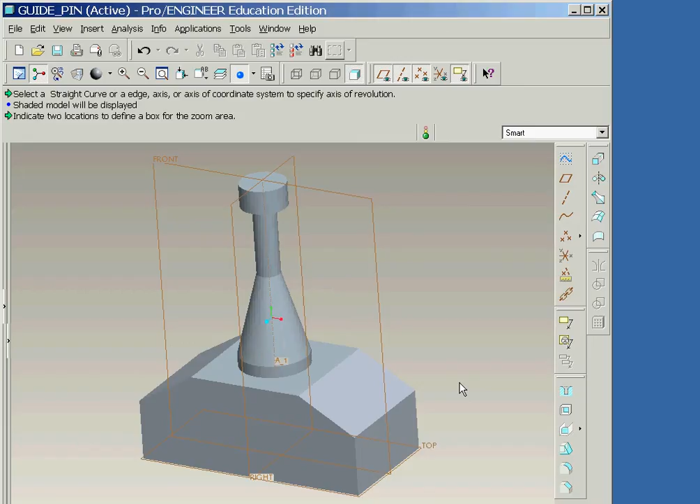In this session, we'll construct our new part's base feature and then examine how a revolved feature can be created. We will start a new part using the default template this time and naming the part Guide Pin.

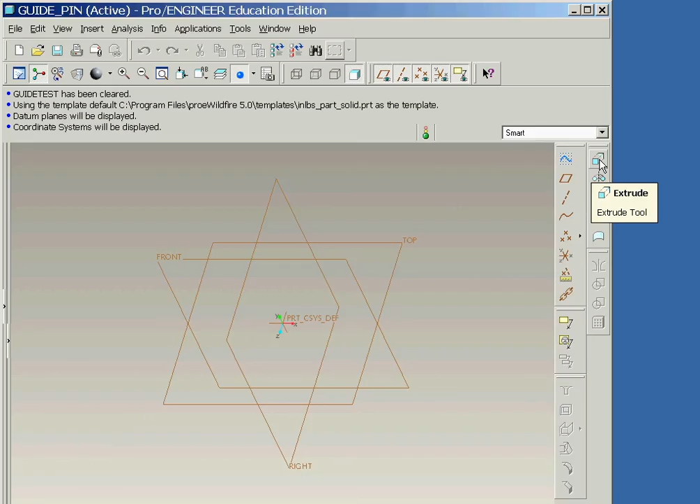We will be sketching a profile of our base feature on the front datum plane and then extruding it on both sides, so we'll start by selecting the Extrude tool icon. And then click on Placement and Define. We will now click on the front datum plane in order to select it as our sketching plane.

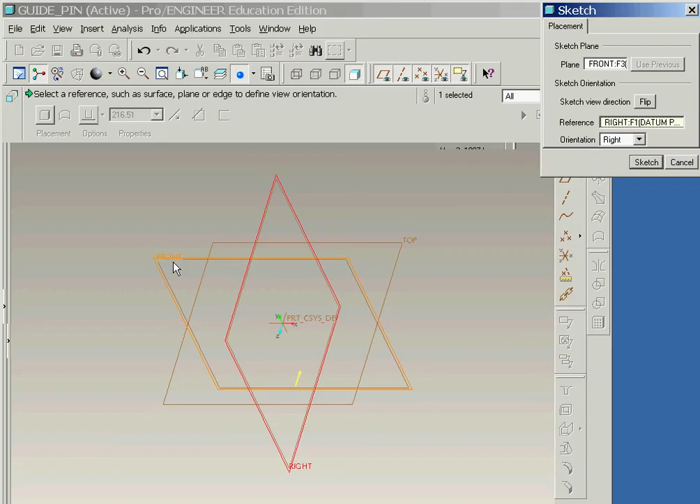Notice that the right datum plane has automatically been selected as the reference plane. Since this is what we want, we'll now click the middle mouse button. As you can see, the dashed lines indicate that the top and right datum planes have automatically been selected as the sketching references.

Before we start to sketch our profile, we'll turn off the display of the datum planes and the coordinate system. We'll next click the right mouse button and then select the line icon. We'll now draw the profile by using a series of left button clicks, followed by double-clicking the middle mouse button to stop the process of drawing lines and entering select mode.

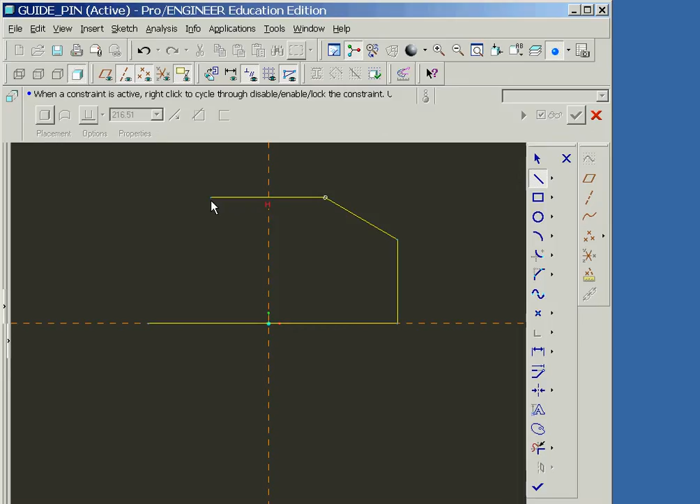Next, we'll click and drag the dimensions of the profile in order to clean up the sketch. We will now click on 3 of the dimensions and change their status to be Strong Dimensions by clicking the right mouse button and selecting the Strong option.

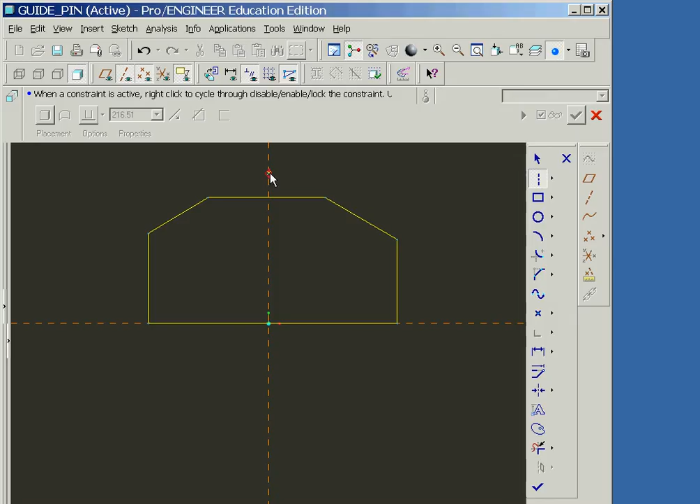Next, we'll add a center line to our sketch. And then we'll use the Sketcher Constraint icon in order to impose symmetry in our sketch. We will do this by first selecting the center line and then the 2 endpoints that should be symmetric about the center line.

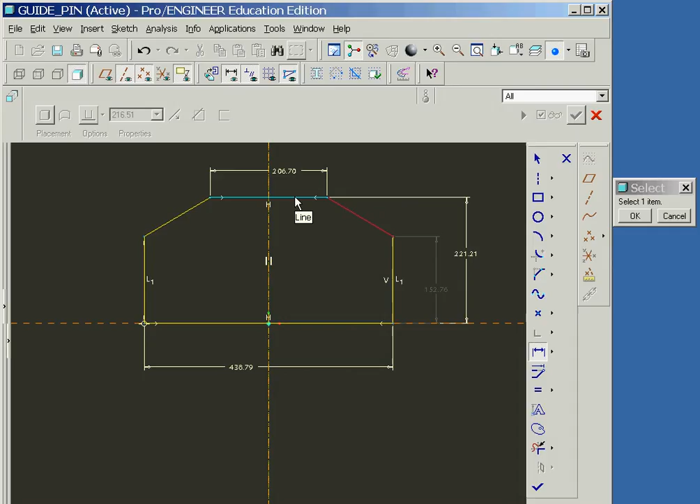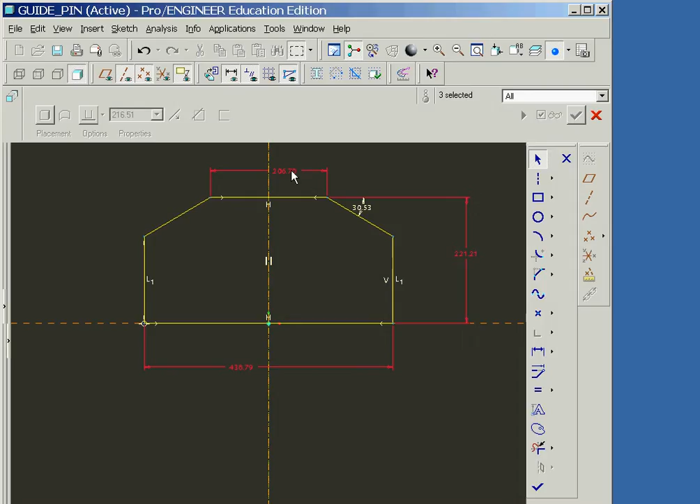Next, we will add an angular dimension by clicking on the 2 lines and then clicking the middle mouse button at the location where we wish to place the dimension. Now, in order to change the dimensions to the correct values, we'll first make sure that we're in select mode. And then we will hold the Control key down while we click on each of the linear dimensions in order to select them all, followed by selecting the Modify button.

We will now make sure to check the Lock Scale option since we want all the dimensions to change. Now we'll change the width dimension to 20. As you can see, all the dimension values change proportionately. Now we'll change the other 2 dimensions to the correct values. We will now change the angle dimension by double-clicking on it and entering the correct value.

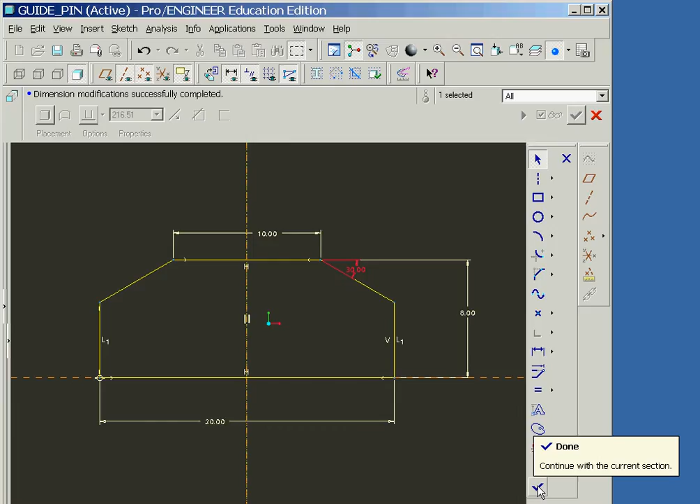Since our sketch is now complete, we'll now click on the check mark icon. And then, in order to improve the view of our protrusion, we'll now rotate the model. In the dashboard area, we'll change the extrusion direction so that it extrudes on both sides of the sketch plane. Next, we'll set the depth to be 10 units and then finally accept the feature.

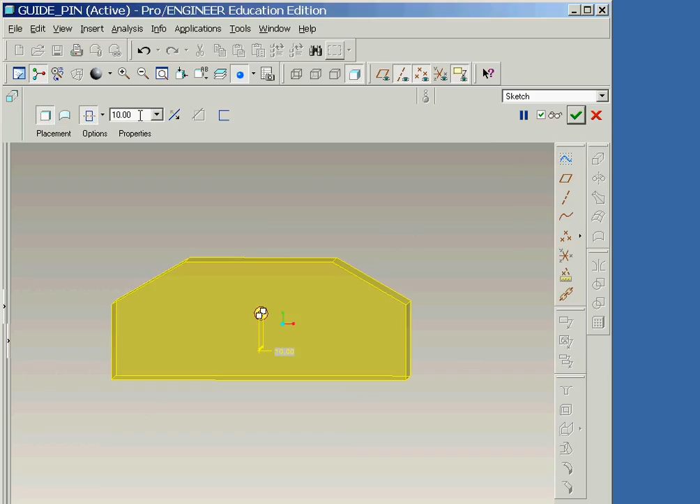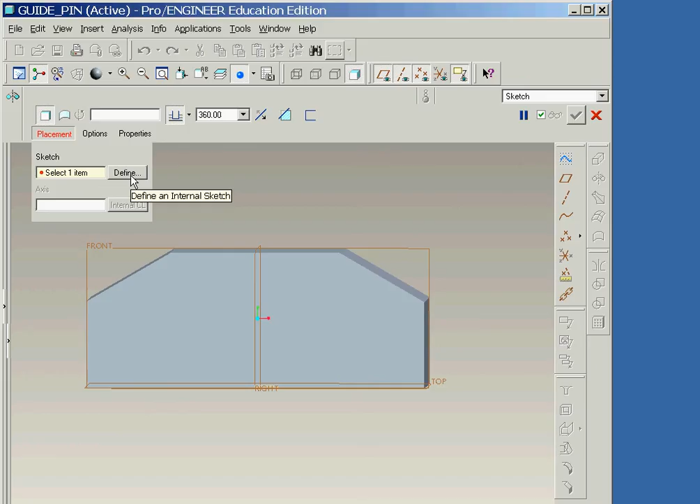We will now add a revolved feature on the top of our base feature. We will start this process by again displaying the datum planes, and then clicking on the Revolve tool icon. We'll be sketching the profile of the revolved protrusion, so we'll next select Placement and Define in the dashboard. The front datum plane will be our sketching plane, so we'll click on it now and then click on the Sketch button since the default sketch orientation will be OK.

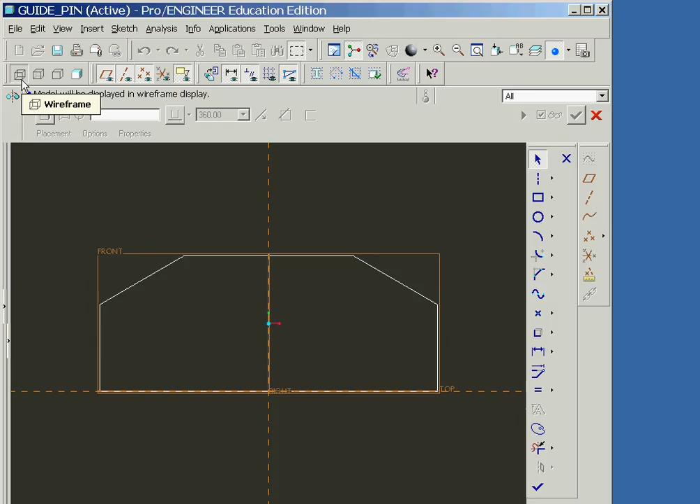We'll now draw a half cross-sectional shape of the handle, which will then be revolved 360 degrees about a center line that we must also include in our sketch. Since we want the revolved cross-section to sit directly on the base feature, we'll now click on the top surface of our base feature in order to add it as a reference.

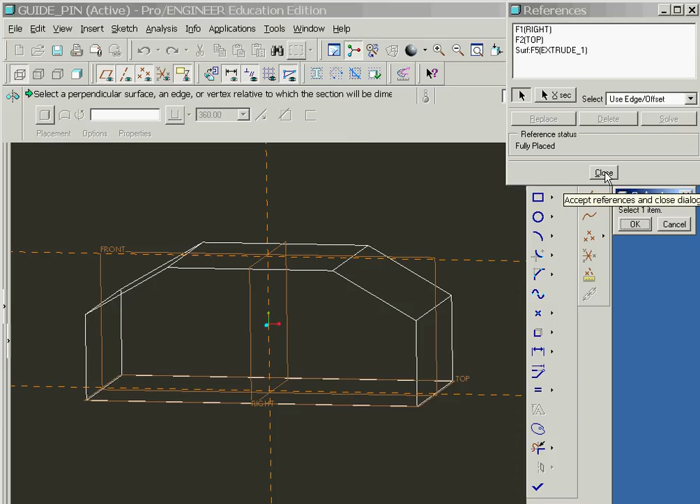And then we'll rotate the model slightly in order to view our new reference. Since it appears correct, we will close the reference window, and then we will reorient the sketch, dragging it back to the bottom of the screen.

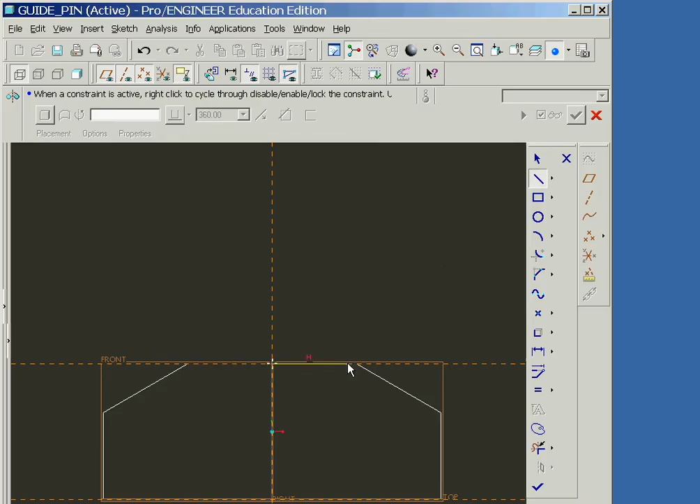We'll now select the line icon, and then using a series of left clicks, we'll sketch the feature's cross-sectional shape. Notice that the last line of our sketch lies on the axis of the revolved feature and also closes the cross-sectional shape. All revolved protrusions must also have a center line that lies on the axis of revolution, so we'll select the centerline option, and then click the left mouse button twice to place the center line.

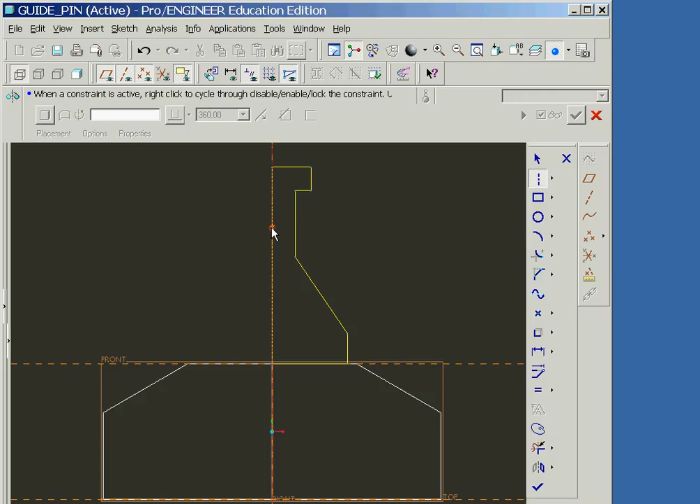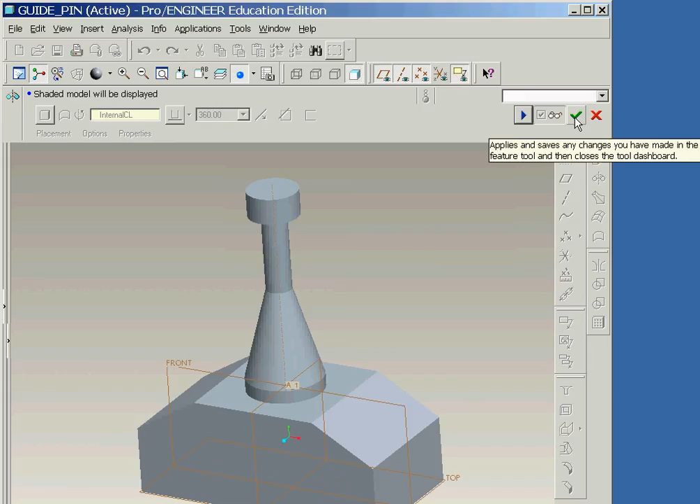We must now modify the dimensions so that the handle is the correct size. We will now jump to the point after which all of the dimensions have been modified. Since we have completed our sketch, we'll click on the check mark icon. The angle listed in the dashboard is 360 degrees, so we'll now verify the part, and then accept it by clicking on the check mark icon.